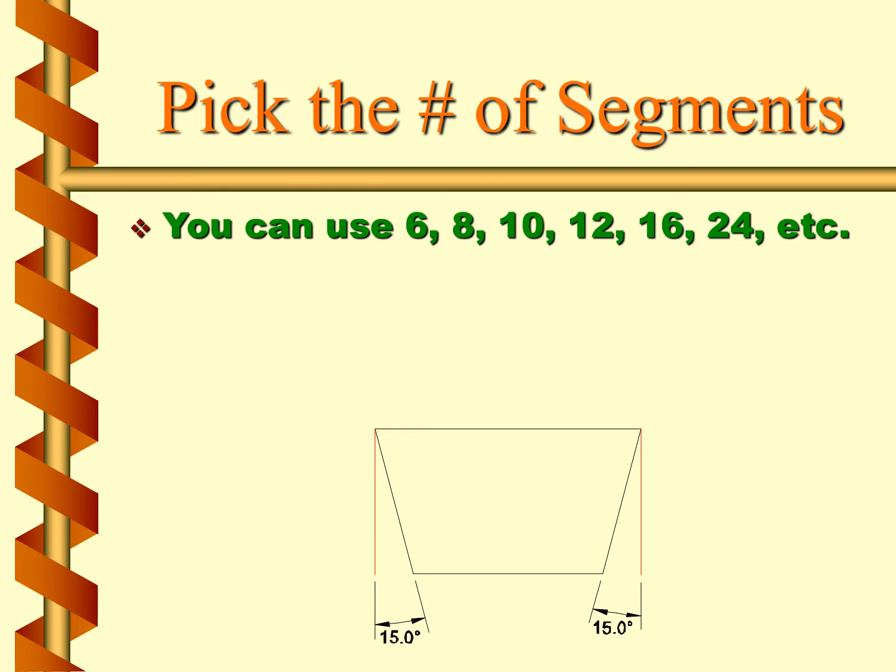Then you have to pick the number of segments. You can pick 6, 8, 10, 12, all the way up as high as you want to go. I've seen bangle bracelets that had 96 segments per ring. Now for this demo, we're going to use 12 segments per ring. And that means that I'll need to cut a 15-degree angle on each one of the segments, on each end. Now, if you pick a different number of segments, you will have a different angle.

Then you lay out your rings. Once you have the form that you want to turn, now we know this is what we're going to turn, you lay out the rings. Now it's very important that you lay out these rings where you can actually see where they're going to intersect the form. We know that rings 1, 2, and 3 are going to be 3/4 of an inch thick. Ring 4 is going to be 1/4 inch thick. But we need to know where they intersect the form so we can take measurements. You just mark where they land.

Now, width is measured radially. It's measured from the center line of the piece to the outside. So the thickness is vertical, the length is around the circumference, and the width is from the center out. Once you understand where these occur, then it's much easier. You don't want to get these confused. If you confuse width and length, you can wind up with a ring that you can't use. It's not going to fit in the piece that you're trying to turn. So it's very important to get a real clear understanding of what they are and what they represent.

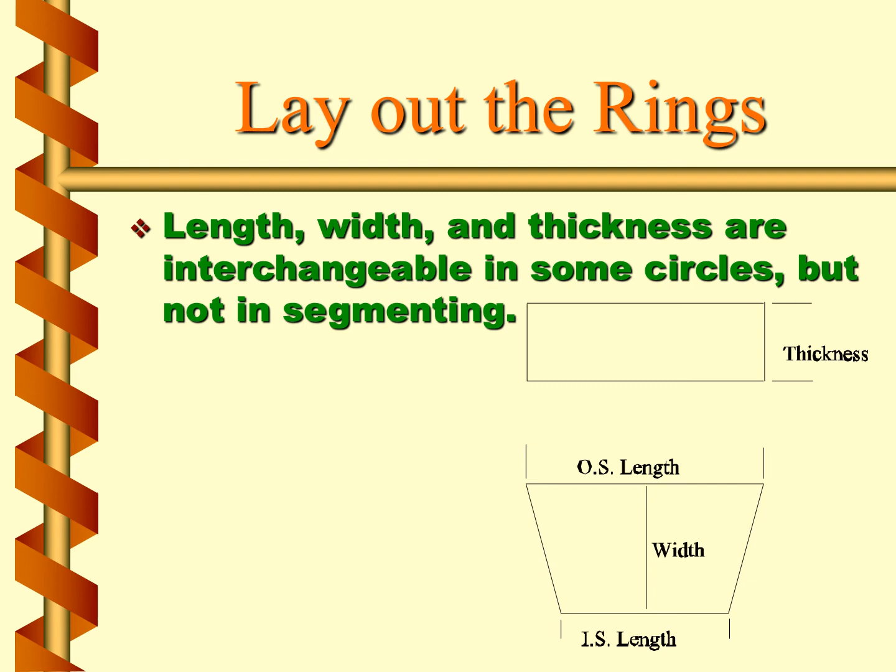Now, to establish the outside radius for ring number 1, we need to add 5/16 to the outside of the bowl. The red lines indicate ring number 1. If you go across the top of ring number 1, when you get to where the line intersects the form, that's where you want to turn it down to. But you need a little extra material. So you add 5/16 of an inch along that line outside of the form. And then when you measure that, you get 3 9/32. So now you know the outside radius for ring number 1.

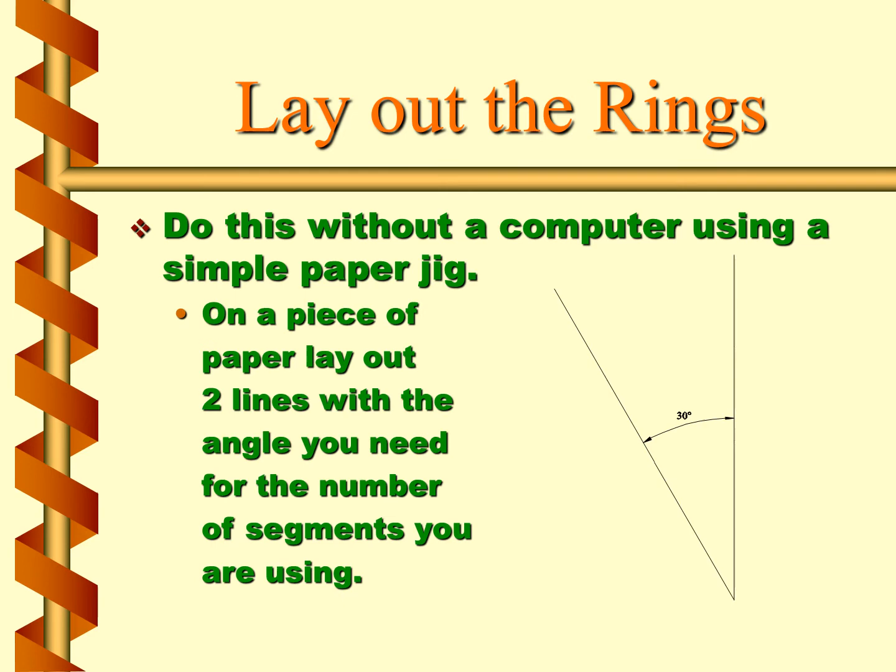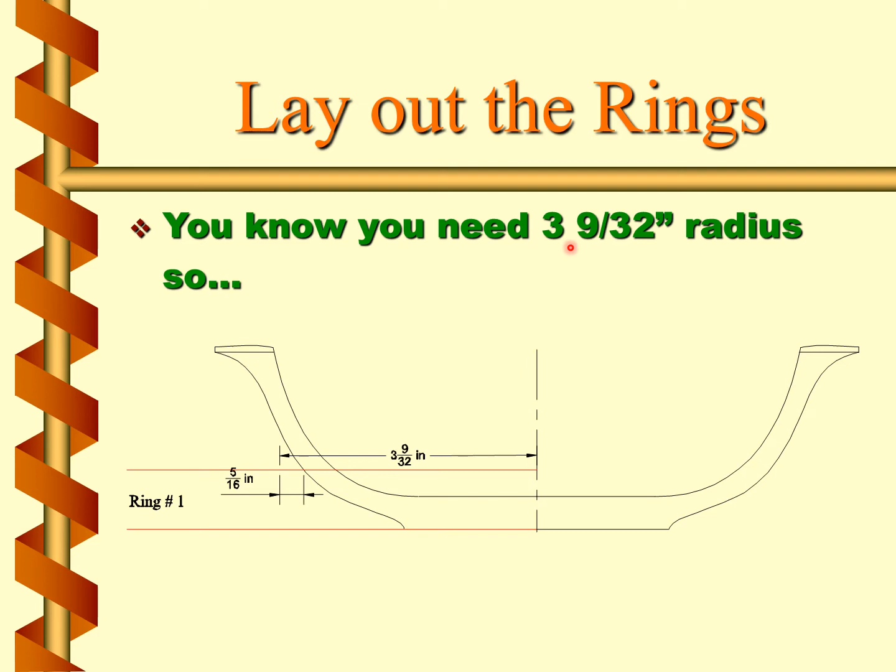Now, what you need on that first ring is that 3 9/32 that we talked about earlier. You already know what that is. So you can go to your paper jig and you can lay out the 2 legs because you know the dimension now. You just measure between the 2 lines to find the length. And you measure top to bottom to find the width. So it works kind of like this.

You start at the bottom, and you're going to measure up this outside line, the 3 9/32. You're going to do the same thing on the other leg, up to 3 9/32. Now, up here where the lines end, you just draw a line from that point to that point. Then you can measure it, and it comes out to 1 11/16. So that's your length.

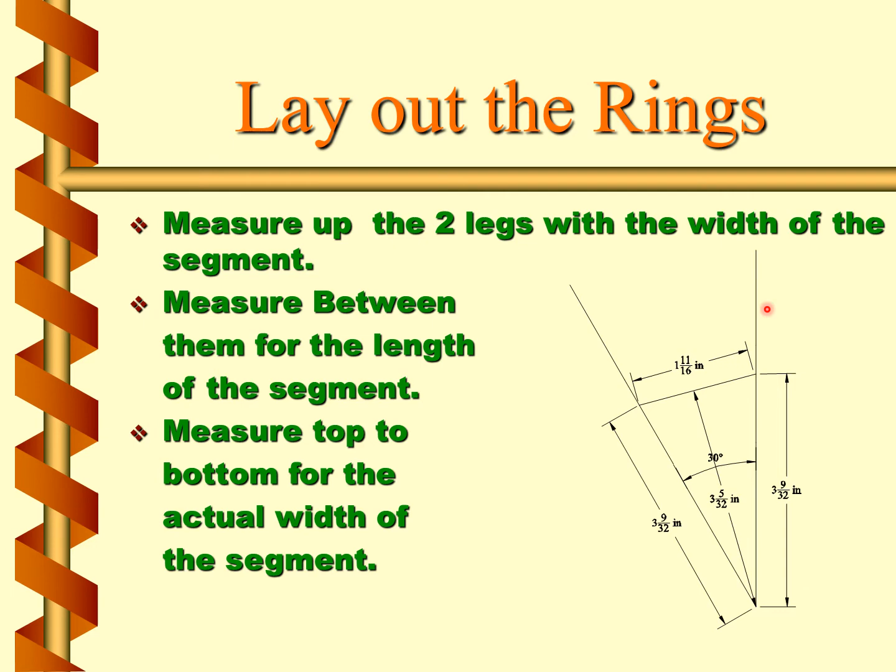Now the width is measured from the point down here all the way up. And this is your width. And that's going to be 3 5/32. So you now have all of the measurements that you need to lay out the segments for ring number 1. And this is what ring number 1 would look like.

Each length, the outside length, is 1 11/16. And that's going to be the same for each one of these segments all the way around. Now the width is the 3 5/32. And that's measured from all the way down here at the center up to here. So it gives you the width and the length.

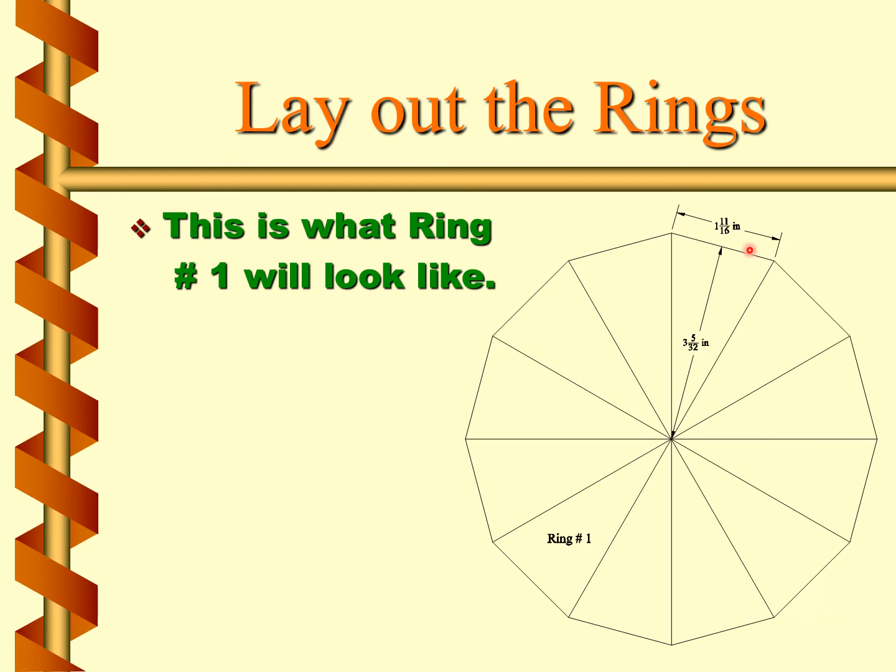Now, when I'm laying out the rings, I use a paper table to record all of these dimensions. And as you can see, we had the 3 and 9/32 for our outside radius. There was no inside radius because it went all the way to the center. Our thickness is 3/4 of an inch. The width is 3 and 5/32, and our outside length is 1 and 11/16. Now these are the two dimensions that we determined from our paper jig.

Now the inside length it doesn't have because it goes all the way to the center. And our blank length is 13 inches. Now I'll show you in just a minute how we determine this blank length. It helps to know how much wood it's going to take to cut all 12 of your segments out of the same piece of wood. So that's how you do it with the blank length.

Now the blank length uses a formula. It's the outside length plus the inside length plus 1/4 of an inch multiplied by 6. And that equals the blank length. Now when we actually do the math, we take our outside length, which is 1 inch and 11/16. Then we add the inside length, and in this case it's 0 because that ring number 1 went all the way to the center, so it has no inside length.

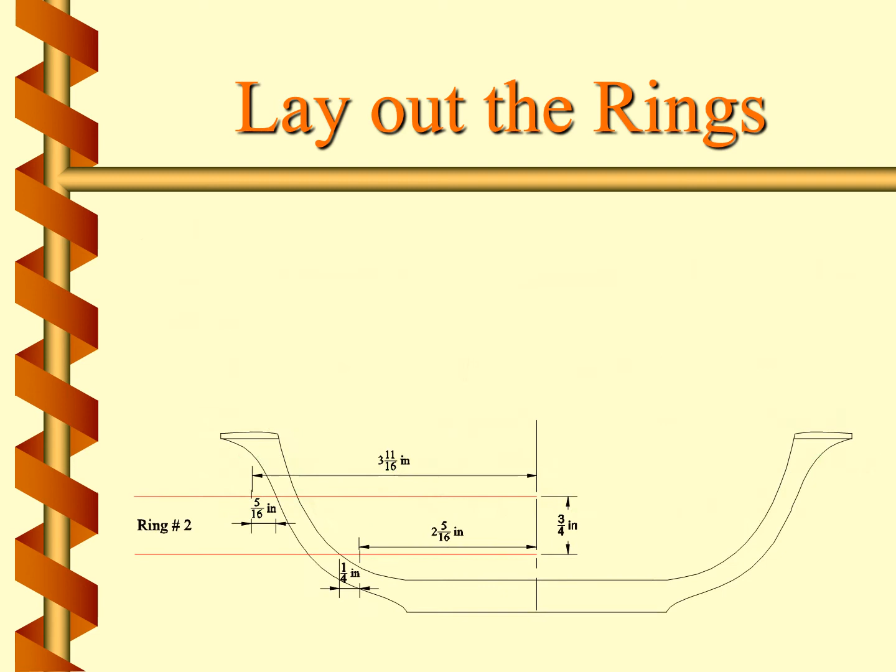Now ring 2 is a little bit different because it will have an inside radius and an inside length. But it's done very similarly. We take our long side of ring number 2, where it intersects the form, we add the 5/16 of an inch. So that's exactly the same on all of the rings on the outside. We add the 5/16. Now this one adds this 1/4 inch measurement here, where the bottom of ring 2 intersects the form.

We subtract 1/4 of an inch. This gives us extra material on the inside so that we've got enough material so that when we start turning it away and we turn to the form, we have enough material to actually shape this particular form out of what we're cutting. So we'll measure from the center to that 1/4 inch mark, and that'll give us 2 and 5/16. Now on the upper side, it's the same thing. We measure from the center out to the 5/16, and that gives us 3 and 11/16.

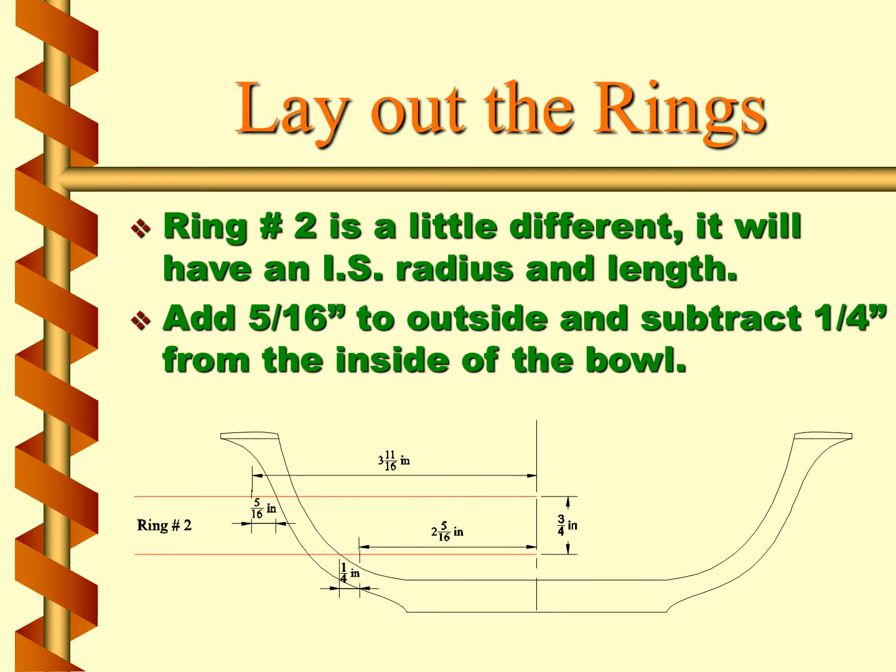So we now have all of the measurements that we need to lay out ring number 2. And that's by adding the 5/16 to the outside and subtracting the 1/4 inch from the inside. Now, when we go to lay it out on our paper form, we're going to measure up the 2 legs with the inside and outside radius. We'll measure between them to get the inside and outside length, and we'll measure between the lines to get the width, and it will look something like this.

Now, we'll take all of these measurements that we just made and we'll transfer them to the table. So now you can see for ring number 2, that was our inside and outside radius. We know that our thickness is going to be 3/4 of an inch. We know the width is going to be 1 11/32. The outside length is 1 29/32. That inside length is 1 3/16. Now, when you do the math with that formula, you'll come up with a blank length of 22 inches.

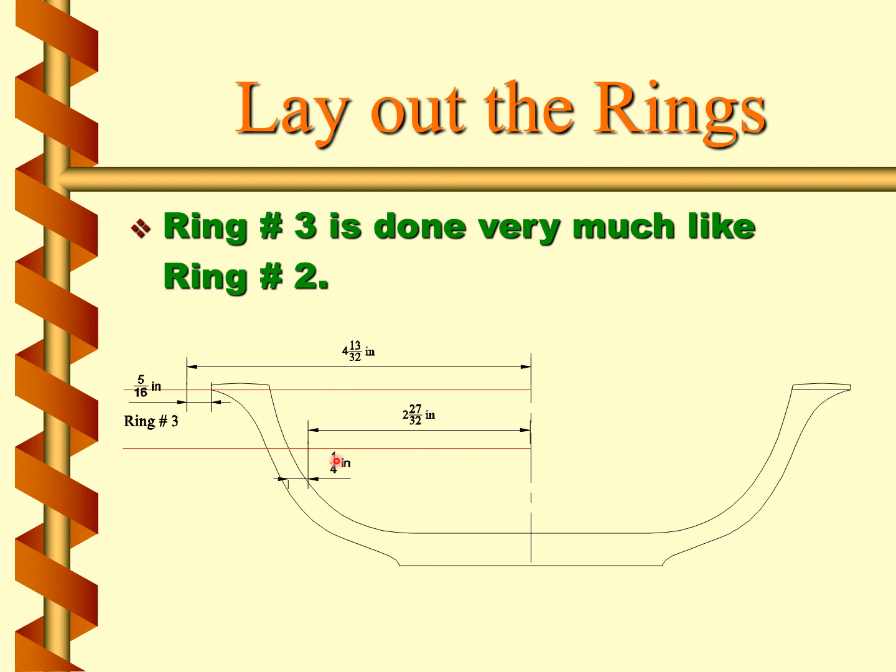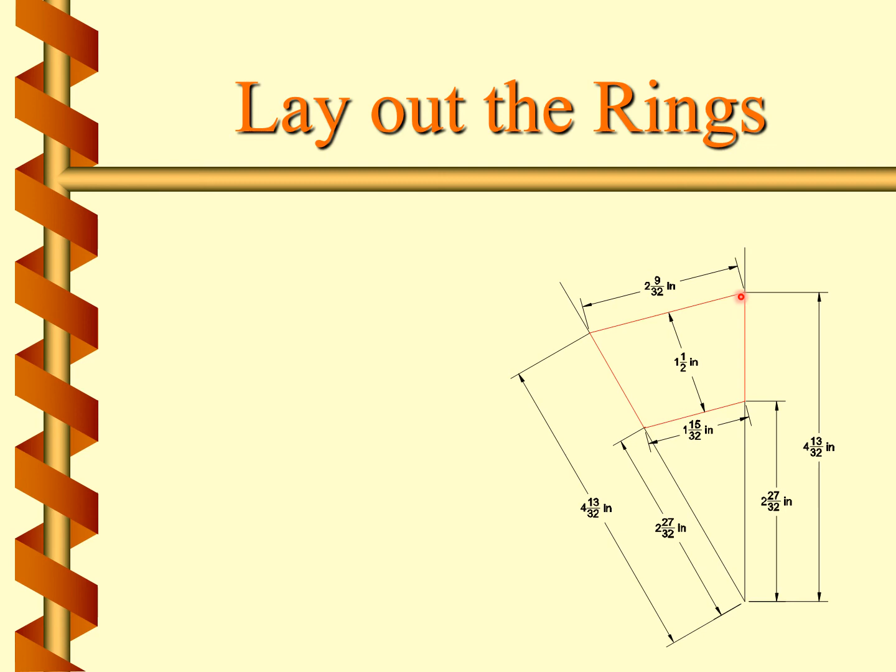Now, ring 3 is done very much like ring 2. We're not going to go through all of the explanations, but you have subtracted the 1/4 inch and you have added the 5/16. You do that consistently with every ring. 5/16 on the outside, 1/4 inch on the inside. And you lay them out the same way. You would do your outside radius, your inside radius, draw the lines, measure the outside, the inside, and the width. And in red is the actual shape of the segment for ring number 3. And like I said, it's done the same way.

Now we'll update the table. And that's all of our measurements for ring number 3. And we wind up with a blank length of 25 inches. Now, ring number 4 is so close in size to ring number 3 that we're just going to duplicate it. The only difference is it's going to have a 1/4 inch thickness instead of 3/4. And there's our updated table for ring number 4. And it's 1/4 inch thick, 1 1/2, 2 9/32, and 1 15/32. And it has the same blank length of 25 inches.

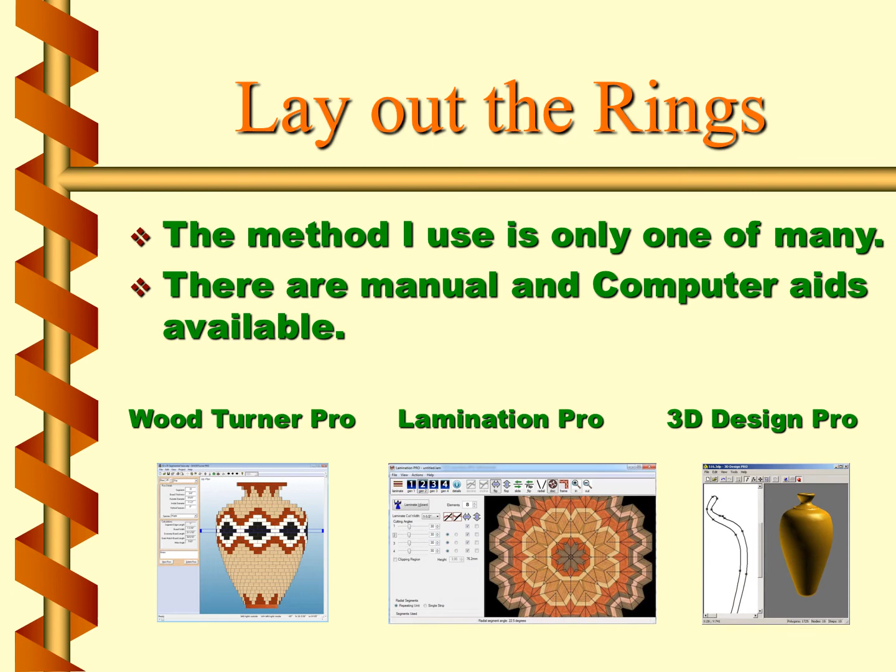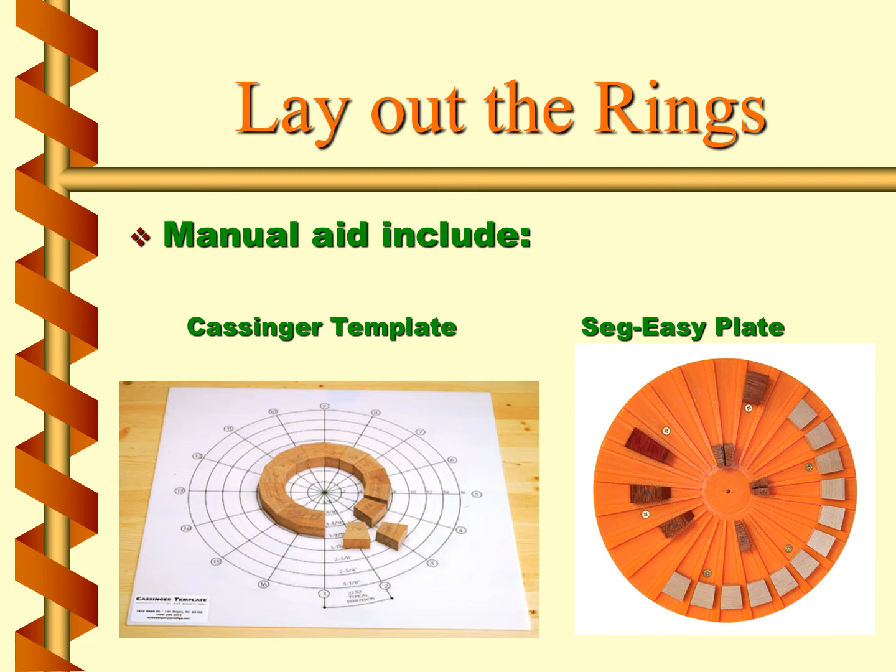Now, the method I use is just one of many. There's lots of different ways to calculate rings. There's manual and computer aids available. The computer aids include programs like Wood Turner Pro, Lamination Pro, and 3D Design Pro. The manual aids include things like the Cassinger template and the Seg-Easy plate. There's lots and lots of different methods. And if you find that one of these other methods works better for you, then use it. What's illustrated in this program is simply what I do. And that's not necessarily the best way for you.

Now, our next thing in line is to cut the segments. Now, before we cut the segments, we need to prepare the blanks for each ring. We've figured out from our chart that ring number 1 needs to be 3/4 thick, 3 5/32 in width, and 13 inches long. So we just have to do the same thing for rings number 2, 3, and 4. We know the thickness, the width, and the blank length for each one of them from our chart.

Now you have to cut the correct number of segments from each blank. In this case, it's 12. Now, the method and the saw that you use is up to you. I'm not going to tell you how to do it. You have to do it with your own equipment. You just have to make sure that each angle that you cut is exact. Close is simply not good enough.

If you've got 12 segments, you're making 24 cuts. If you have just a very small amount of error in your setup and you cut those 24 cuts, you have multiplied whatever error you had to begin with by 24. And that's going to produce a gap between your segments. They're not going to all touch for their full length. There will be a gap somewhere in your glue up for those 12 segments.

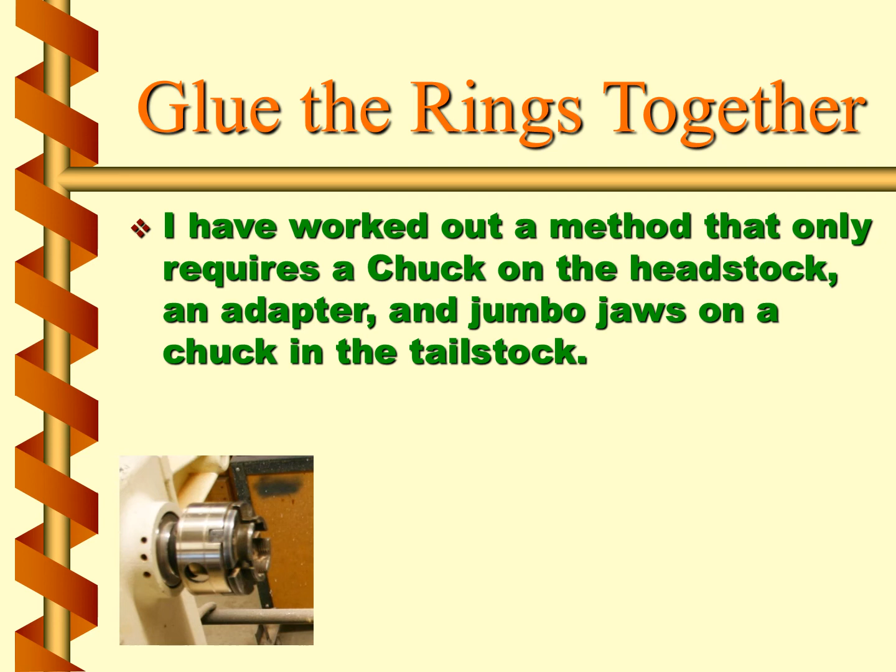So I've worked out a method that only requires a chuck on the headstock, an adapter, and jumbo jaws on the tailstock. If you already have the equipment, then it's not that big a deal. But you need a chuck on your headstock. This is called a reverse chucking adapter. It has a number 2 Morse taper on one end, and it has threads on the other.

Now, these threads fit your chuck. So you would put this in your tailstock, and then you would take your second chuck with the jumbo jaws, and you would screw that onto the reverse chucking adapter. And that gives you a chuck on your headstock and a chuck with jumbo jaws on your tailstock.

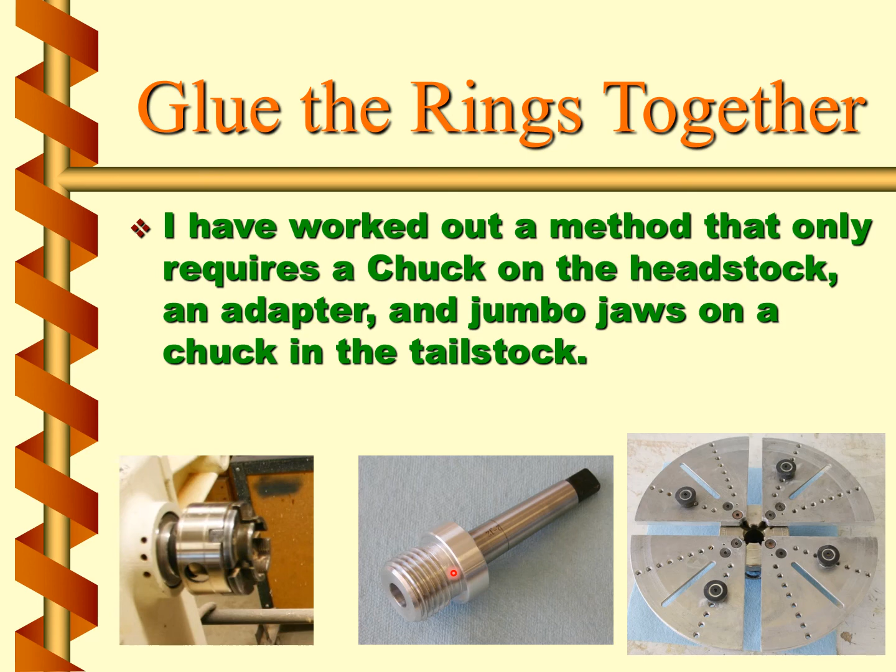And then you would put a sacrificial piece, in this case mine is 2.5 inches square, in the chuck on the headstock. And you take your number 1 ring, which would be the bottom of your bowl, and you put that onto your jumbo jaws on the tailstock.

Now, you'll also notice that there are only 4 of the buttons. I've taken 4 of them off. You're only holding this in place. You're not actually going to turn it from here. Plus, you have a 12-sided object, and 12 is not divisible by 8, but it is divisible by 4. So you're better off if you take half of your buttons off and just do this with the 4.

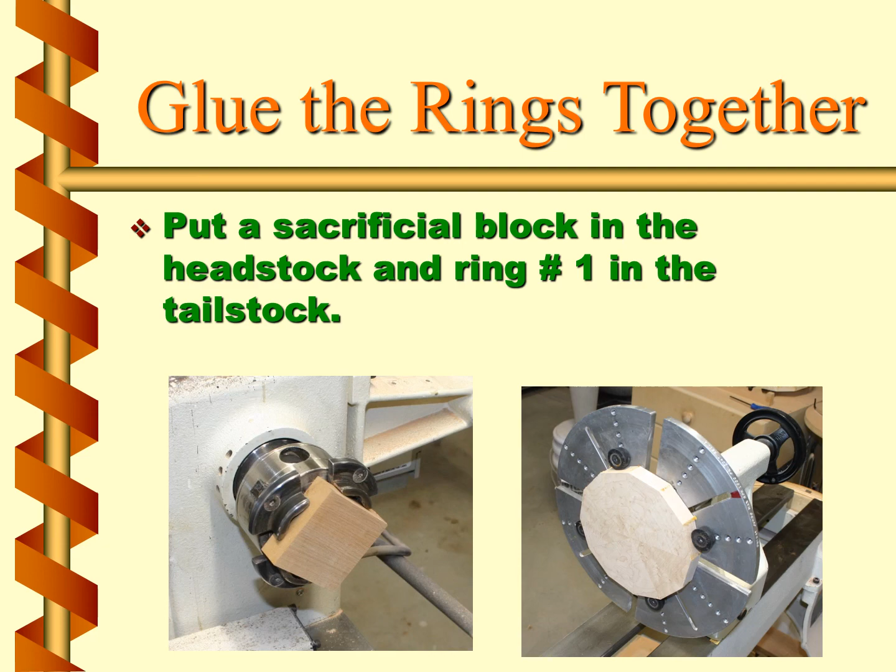Now, you have to glue the ring number 1 to the sacrificial block. It's a very simple thing. Your headstock and tailstock are on the same center line. So when you bring up that number 1 ring and glue it to the sacrificial in the headstock, you're automatically centered. So you don't have to worry about that.

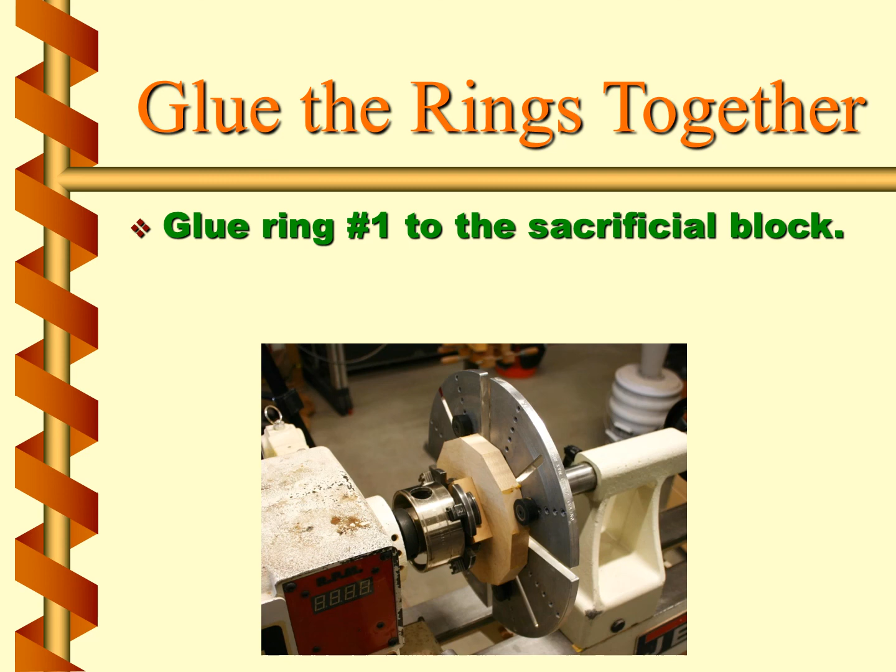Now, when you set up and glue the ring number 2, you simply back the jumbo jaws off the number 1 ring, readjust it, put the number 2 ring on it, and bring it up. But there's one other thing that you have to be careful of. If you see right here, we have the joint line between 2 segments. That has to be centered on the segment in ring number 2. So this joint has to be on the center line of this segment.

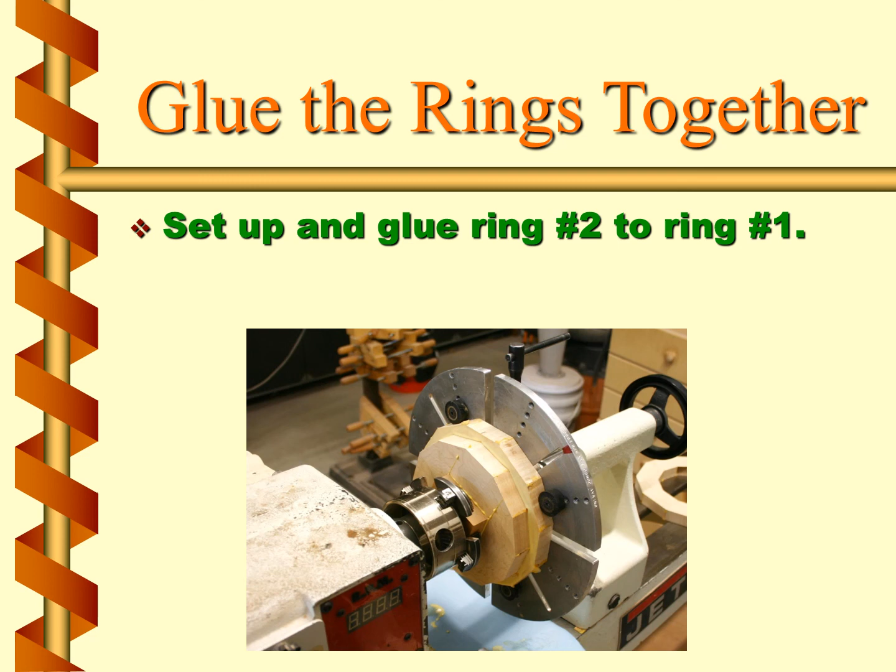And it makes it look like a block wall. Each row is offset by 50% in a block wall. And you need the same appearance in your segmenting, or it's going to look funny. And like I say, you have to line it.

Now, gluing up ring 3 and 4 is done in exactly the same manner. You just back the jumbo jaws up, put the next ring on it, apply the glue, bring it up, set the radial alignment, and put pressure. Now, when you're doing this, you don't have to let each ring dry completely. You can just let it set for about 5 minutes. All it has to do is tack up so it won't move. So you can actually glue all 4 of these up in about 20 minutes or so.

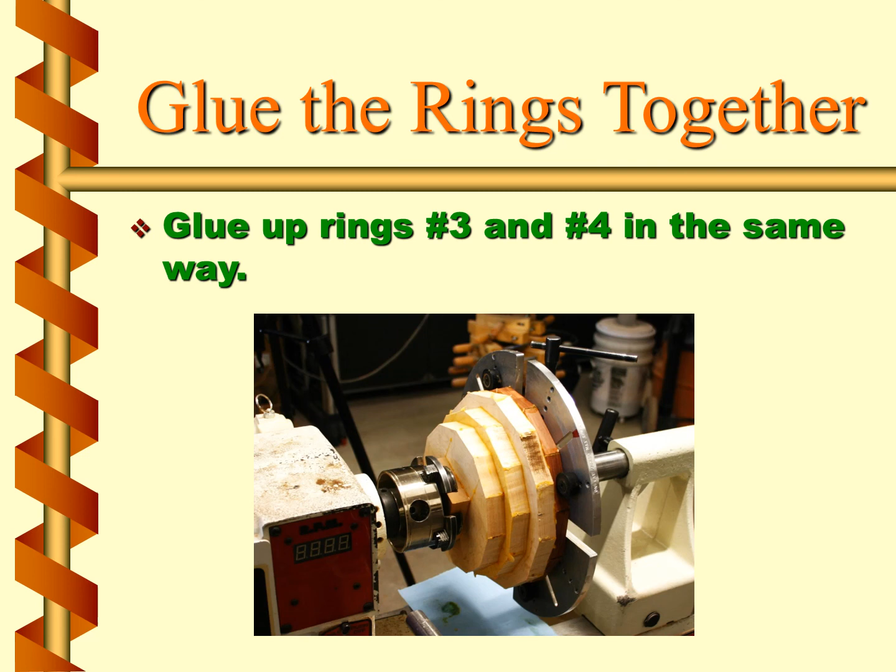You just let it set for about 5 minutes, remove the jumbo jaws, put the new ring in there, apply the glue, put the second one up, align it, put the pressure, let it set for 5 minutes, take it loose, put the next ring. So you can actually add a ring every 5 minutes as you assemble your project.

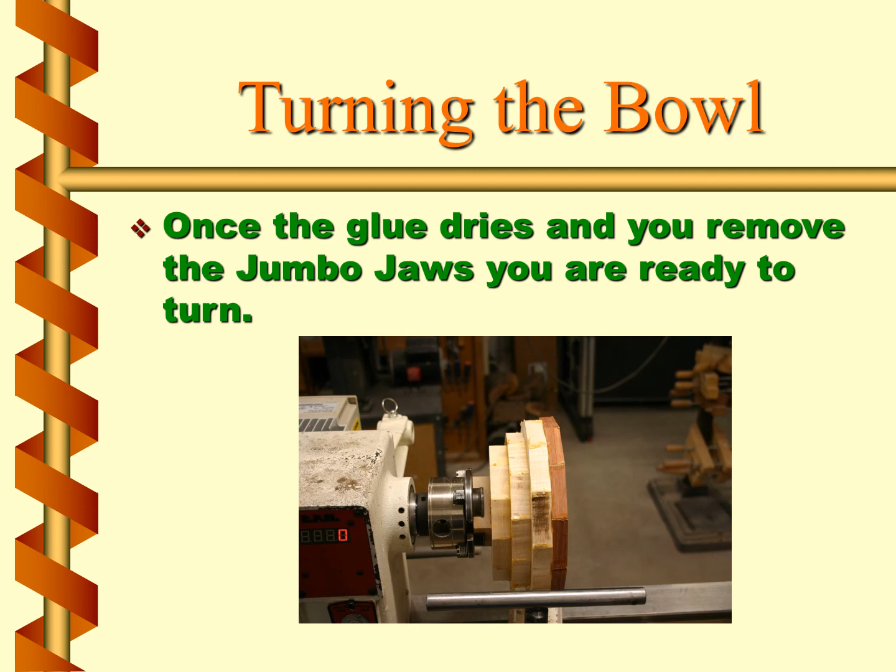Now, once it's glued up, it's time to turn the bowl. Once the glue dries and you remove the jumbo jaws, you're actually ready to turn. You just get everything out of the way on the tailstock, and the headstock is already set up. You have all 4 rings glued together to a sacrificial already attached to your chuck. All you have to do is turn it.

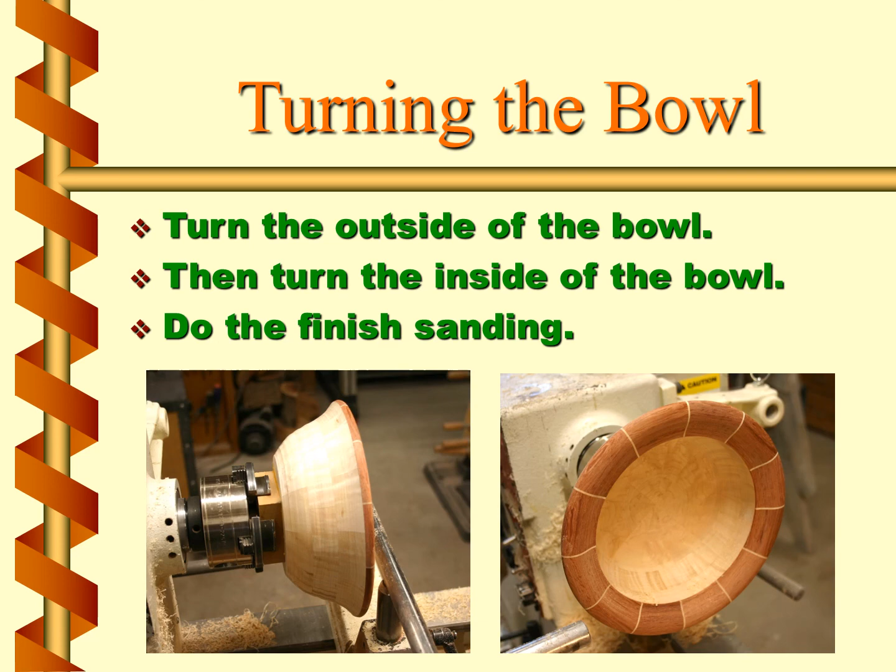And you do that. You turn the outside of the bowl first, get that outside shape, and then from the same setup, you just move to the inside, turn the inside shape, and you follow all of the same rules that you do for turning any bowl. So you get your shape inside and out, and then do your finish sanding. You would do the majority of the sanding now, both inside and out.

And then you'll use your jumbo jaws again. You remove the bowl from the chuck and you mount the rim of the bowl in the jumbo jaws, and then you turn off that sacrificial that you had in the chuck. You'll just turn that off completely.

And I like to put an O-ring in the bottom of most of the work that I do. And this is where I would cut the groove for the O-ring. So if you plan to put an O-ring in your bowl, this is where you would actually cut the groove. And it's a simple thing. You just pick the O-ring you're going to use, and you cut a groove in the bottom of your bowl that will accept that O-ring. It's not a difficult thing to do.

And then you just apply the finish that you want. On a bowl like this, I normally use a lacquer finish, and then I polish that lacquer. But you could use wipe-on poly. You could use butcher block. There's all kinds of finishes that you could put on it. It's just whatever you choose. And then just enjoy your bowl. And this is the end.